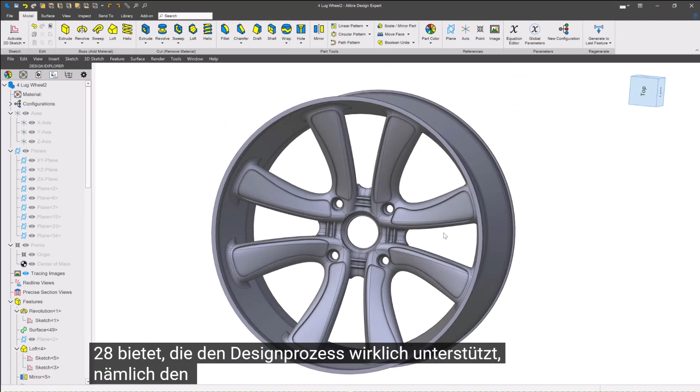Now, there's one thing that Alibre version 28 offers that really helps the design process, and that is to mirror the entire part. I was able to make this wheel just by modeling a quarter of what the wheel actually is. Imagine being able to model a quarter of your fillets, a quarter of your lofts, a quarter of everything that might slow you down.

So you'll have a lot faster performance, especially in rebuilding. But even then, imagine trying to do something like a shell on a certain feature, or a tricky fillet, or anything that might be difficult or impossible to mirror.

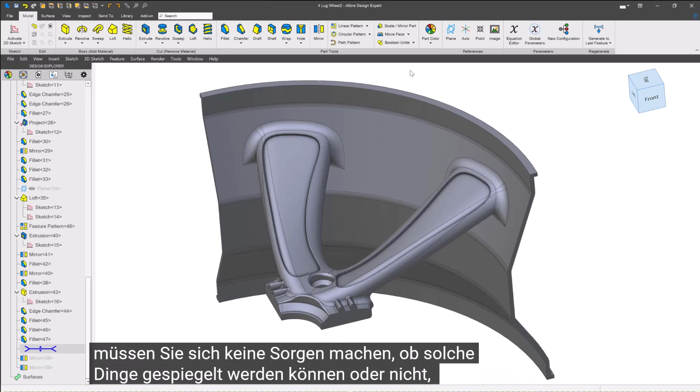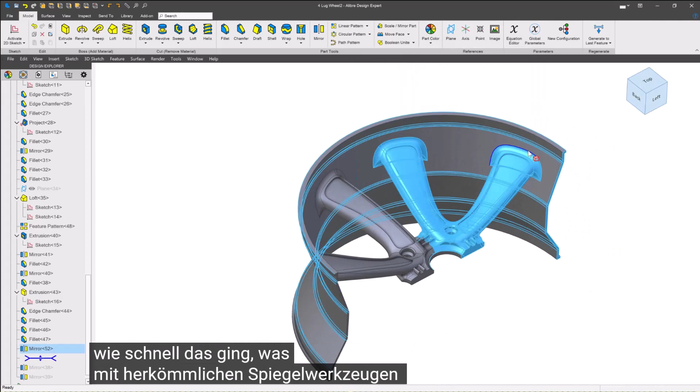And when you're able to mirror the entire part, you don't have to worry if such things can mirror or not. It will work. For example, here I'm able to click on Mirror, and I'll choose Entire Part, and then I can choose my mirror plane. And think about how many features I was just able to mirror in one go and how quick that was. That wouldn't be able to happen using traditional mirror tools. And I can do the same thing. We'll mirror the entire part.

And just like that, I've got my whole entire wheel. And imagine all the computation that I was able to save.

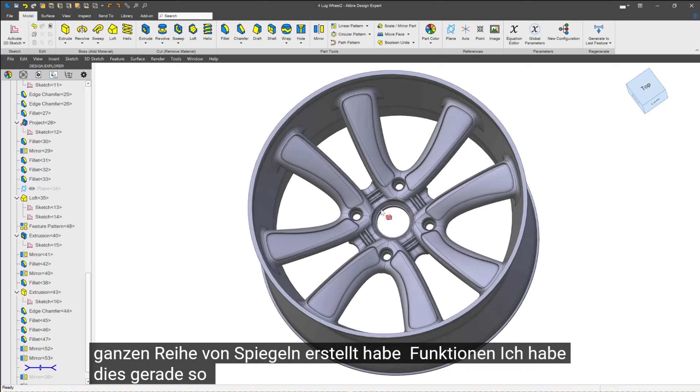And speaking of which, I actually have a model of a Gripen that I made using a whole bunch of mirror features. I just rebuilt this so that it will use the entire part mirror. Let's compare the rebuild times on it.

So this is the Gripen Jet, where so many features are individually mirrored in order to make the symmetric profile of the jet. But let's test how it rebuilds. I'll click on Regenerate All.

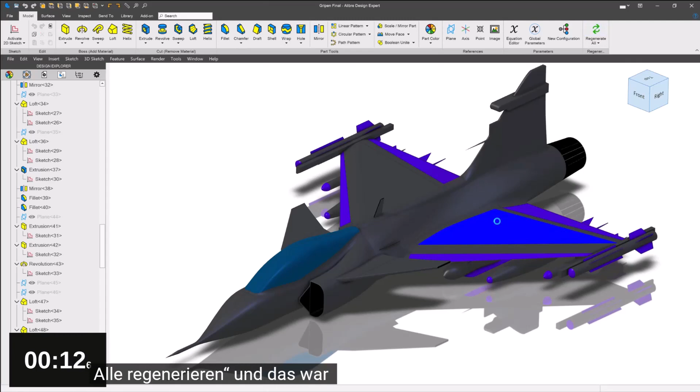And that wasn't too bad. Let's see how the other one compares.

So this is the version of the Gripen that has been modified so that the entire side of the plane is just a body mirror. Let's see how it performs. I'll regenerate all.

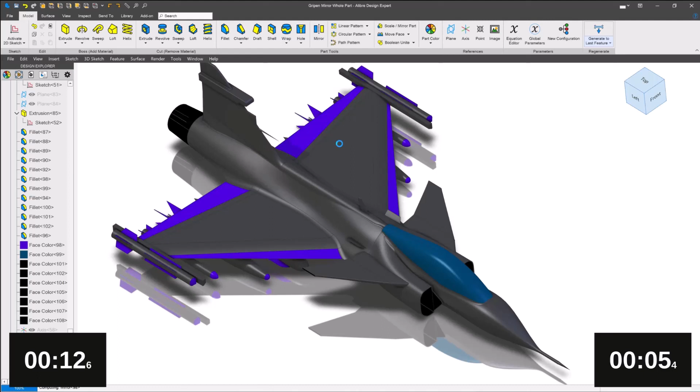Well, I think it's safe to say we were able to rebuild significantly faster, even with the burden of recording my screen as I did so.

But mirroring the entire part does not just benefit your ability to rebuild faster or replicate a lot of components quickly, but it also can help your workflow and file management.

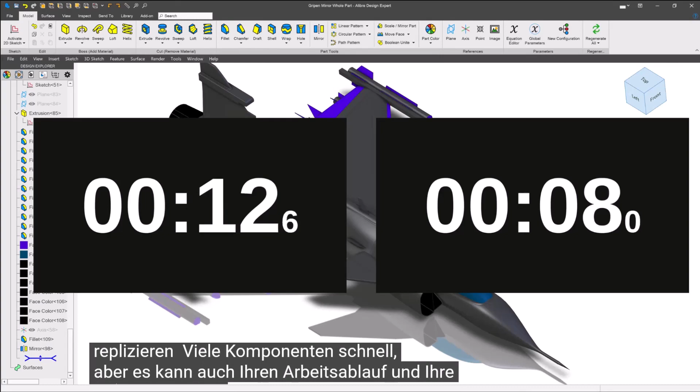Take the case of this toy blaster grip. I was able to make this toy blaster grip in Alibre, but I'll need to use a mirror to get the full thing, right? This comes in 2 parts.

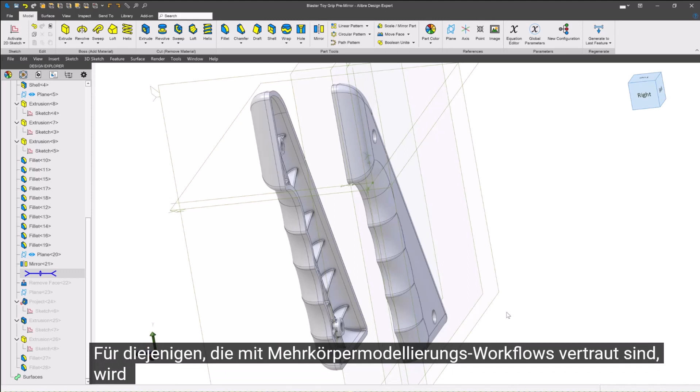When I mirror this, I can see both halves right in my part modeling environment. For those who are used to multi-body modeling workflows, this will help you to feel right at home coming from another platform. And in the multi-body fashion, I was able to reference geometry from my original handle to get mating features between the two to make sure that these will fit together properly.

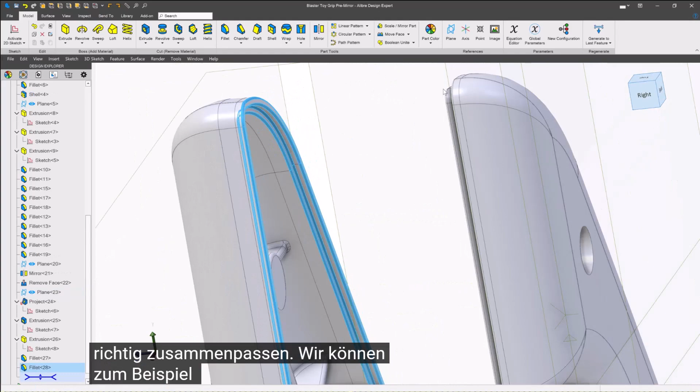We were able to have a reveal boss and groove, for example, that will help these fit together right.

Now, a similar thing can happen in assemblies. We'll use an assembly, mirror the part, work on our features, and then the mirror lives inside of the assembly. That is an especially great workflow if you don't want to have both halves stuck in your part environment like this.

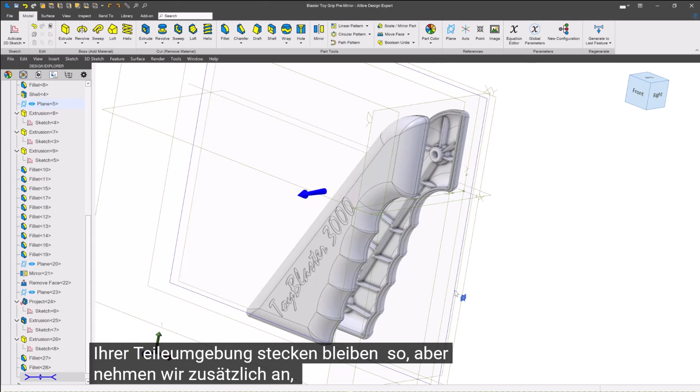But additionally, let's say I'm ready to produce this part, and I give a single part number for both halves. That's a pretty common practice since they come in a set, and to be able to have one single file for both of your halves is a great advantage in organizing all of your files. It also makes it quite clear when you're trying to trace down both halves with your single part number.

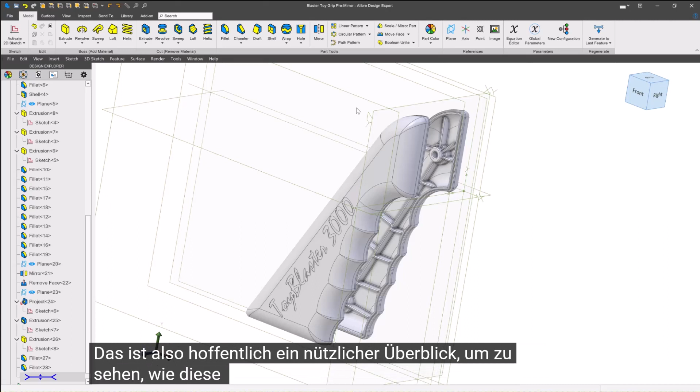So hopefully that's a useful overview in being able to see how this feature can change the way that you organize your part numbers and files, increase your rebuild performance, and be able to model complex geometry very quickly across multiple different cases. Thank you so much for watching.